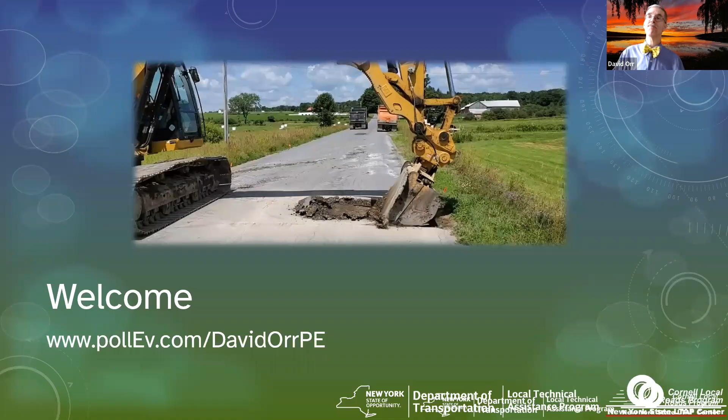So first, just find out who do you work for. So let's see who you work for here. Getting people logged in here. Also check to make sure your Poll Everywhere is working.

Okay, we've got quite a few folks who are ready for the weekend. It's only Tuesday, folks, we got a ways to go, and hey, we're getting rain. I know that's hard to believe, but we're getting rain, and it's nice and slow and steady, which is good for the grass. And we actually need some rain, so that's good. Okay, so about 1/3 of you work for consultants, a blend of town, county, village, and city, and a couple of state folks. So that's good. And then, of course, as I said, folks who are honest and work for the weekend. That's always good to see.

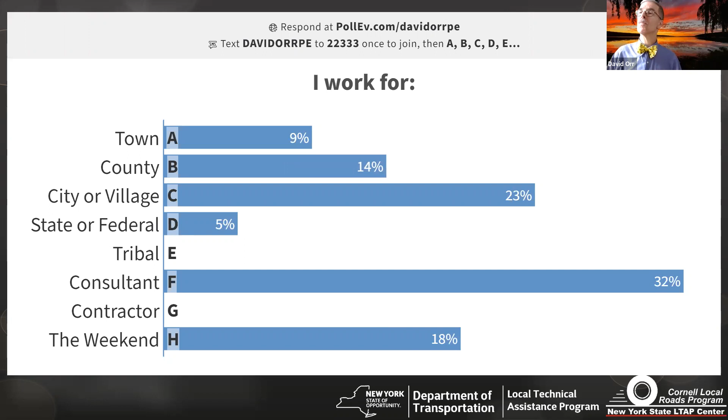Okay, next one here. What is your job? So again, this helps me quite a bit. Are you an administrator? Are you an engineer? Are you the highway superintendent, DPW commissioner? Are you in the field crew? Elected official, supervisor, or board member? Or you can even do none of the above. So my gut instinct today was going to be a lot of engineers and highway people, and yeah, that's pretty much what I'm seeing. Okay.

And if you put in none of the above, you could put your title in the Q&A, that would help me too. Just a quick summary here, so 3/4 of you are engineers.

Okay, that's good. Okay, where are you from? You can actually put a pin on the map. It's actually pretty cool, you drop a pin telling me where you're from. Okay, let's see where we got.

Somebody put in the Q&A from the last question - they're a facilities manager, that's good to know. We got quite a few folks scattered around the state, that's good to see. Today we don't have any swimmers in Lake Ontario, we've had that the last couple of times. I see somebody put in there from Pennsylvania - welcome, thanks for joining us today.

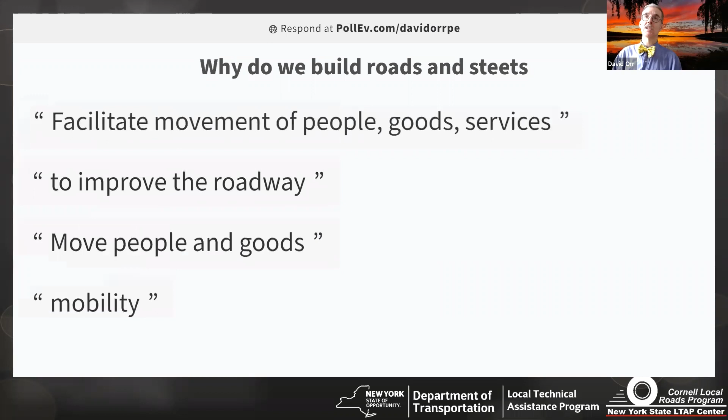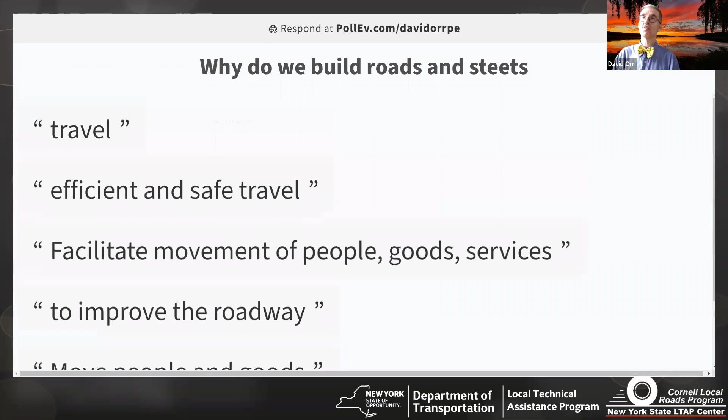And again, to access that you can type it in, or we put a link in the chat. Mobility, moving people and goods. Improve the roadway. Facilitate movement of people, goods, and services - all good answers. Efficient and safe travel. Move people and commodities - all good answers, all the kinds of things we'd expect.

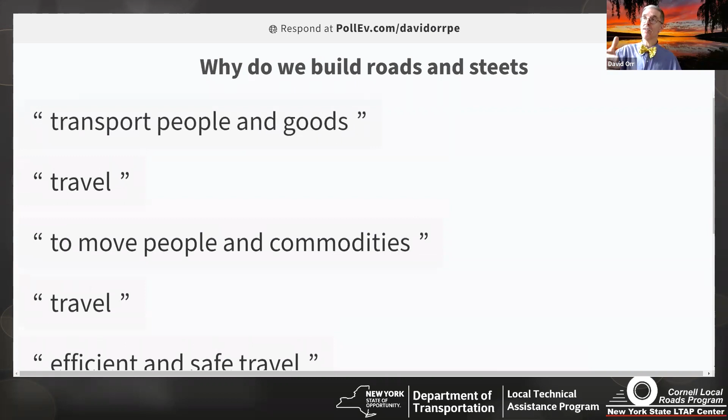You can really break down the why into three things. You need to account for the traffic - different types of traffic on a roadway: cars, trucks, buses, bicycles, and pedestrians. You account for the structure to make sure it can handle the loads on it, and the geometry, so you can go at speeds that are reasonable for the particular location - slow in a local residential area, a little faster, all the way up to the interstate.

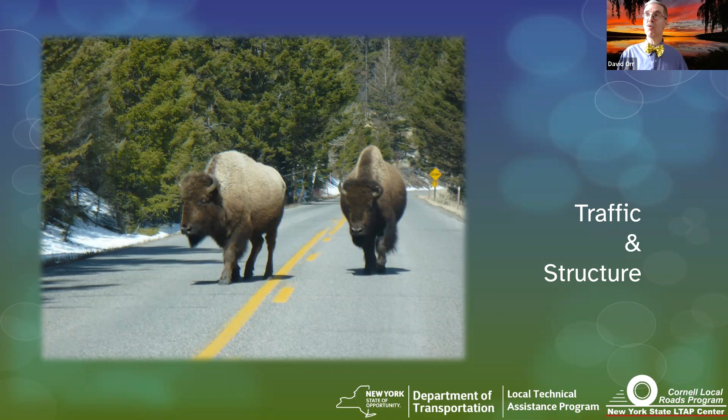Now, in terms of traffic and structure, we had an instructor who taught for us for many years. He liked to say, you need to build the roads to handle the loads. And that traffic can vary quite a bit - this is in Yellowstone, this could be bison that you might see that create their own issues. But roads can come in all kinds of shapes and sizes.

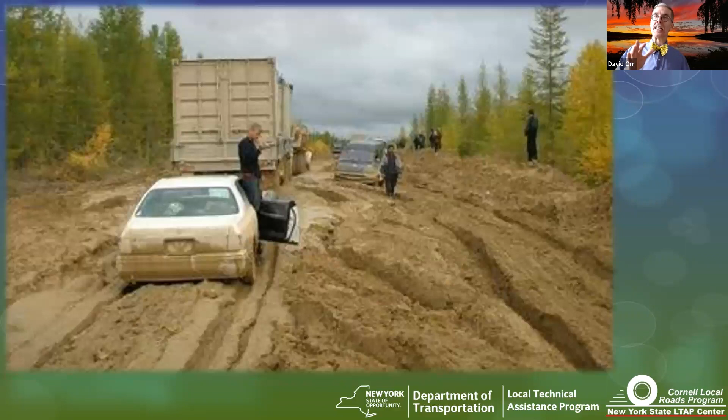It says the sound quality is not great, sounds like you're talking inside of a tin can. Let's just check and see what my sound is picking up - it's the microphone on the webcam. Well, I'm going to have to move on. If it's not good, you might check your audio. I've got somebody else who said the sound is fine, so I don't know.

I apologize for that. This particular material is not a good road structure - I can just tell you, everybody can tell that. But let's talk about what is a good material to build our roadway out of, in terms of the road structure. When we build a roadway, we strip everything off that's organic - these days we sell that - and we build a roadway up on top of the subgrade, the native material. So there might be a sub-base layer, a base layer, and a surface. All of it comes back to handling the vehicle loads.

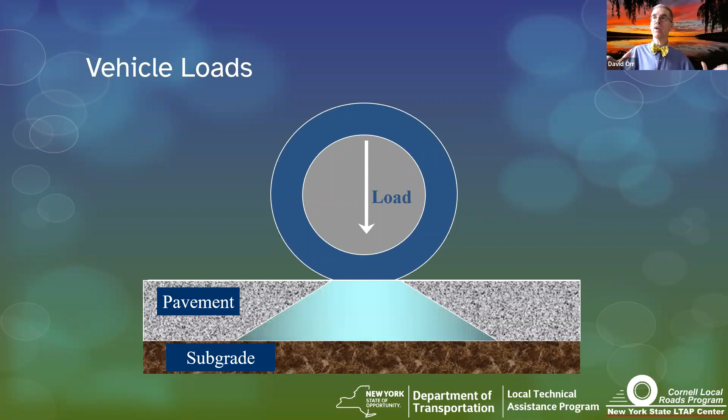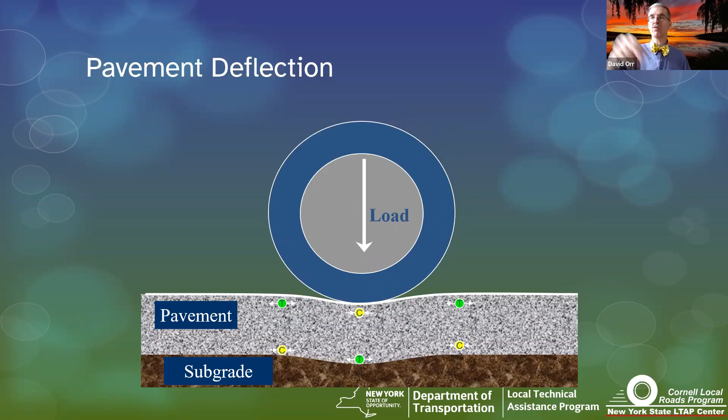You've got a load down there, and that load is spread out over the subgrade. What we're really trying to do is not break the pavement down by too much deflection, back and forth, back and forth. Now, I've got a little drawing here, but a video can show things sometimes even better. This is a video that was part of something done by the Minnesota LTAP Center.

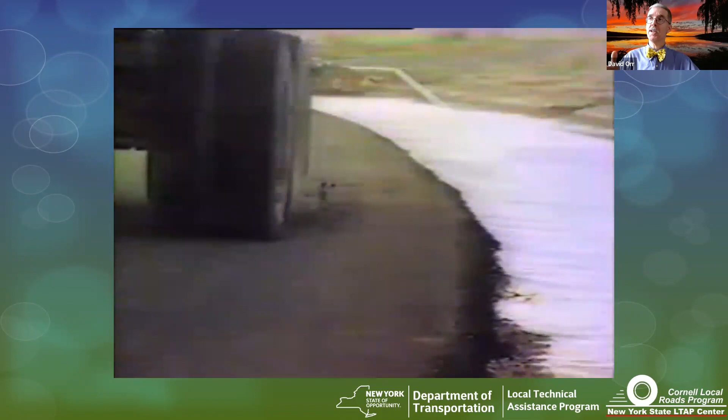This showed testing done by the Forest Service out in Nevada. Watch the two green dots, and you can actually see the pavement move under the load of the trucks. All pavements do this, and the more they do it, the faster they break down. This particular roadway was a testing roadway and failed perfectly, just the way you want it to fail, quickly. We don't want that on our road system.

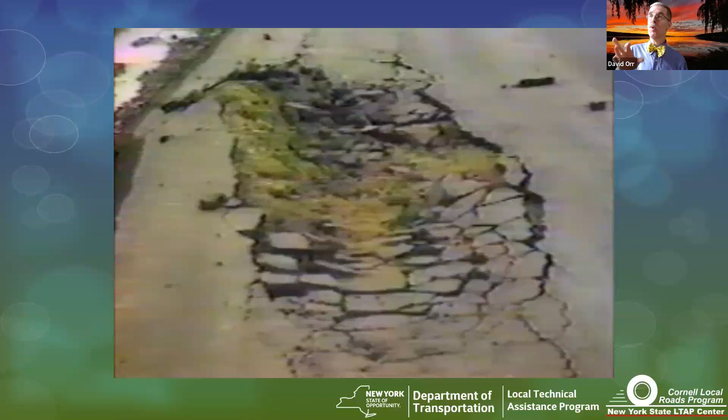Having a road look like this after only 81 passes of fully loaded trucks probably wouldn't be the best choice. So the question is, how do we avoid that? Well, we avoid that by having a really good, proper structure.

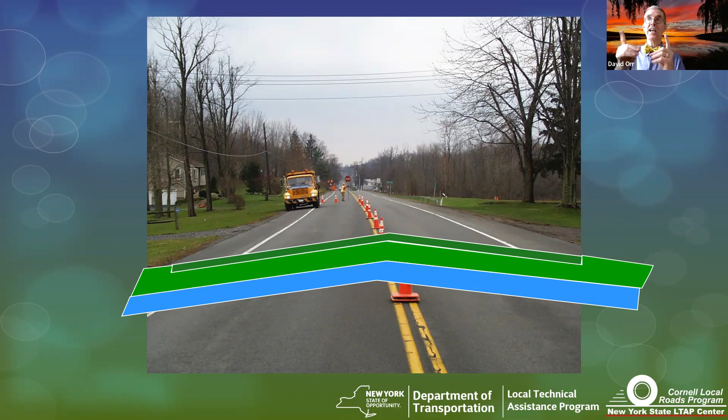If you're on a state highway, your structure is a layer of base gravel, then usually asphalt base, asphalt binder, and asphalt top—lots of asphalt, 8 to 12 inches. In that case, the gravel underneath needs to be good, but surprisingly not as critical as when you get to, say, a county roadway, where you've got a relatively thin layer of asphalt and a gravel base right on top of the subgrade. The gravel has to do more of the work there, so you actually need better gravel because it's doing more of the work.

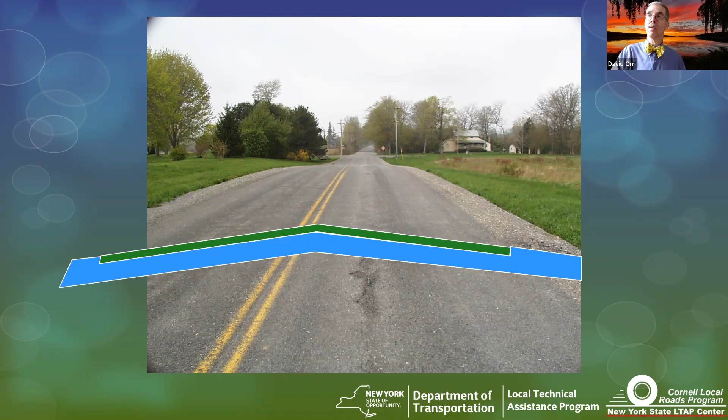You get down to a roadway that's only covered by, say, a chip seal, and that gravel is really doing all the structural work. The chip seal on top is just a surfacing for dust, for traffic, and to help shed some water. And of course, if you have an unpaved road, the gravel is doing all of the work.

Now, just to help me out, raise your hand—how many of you have gravel roads that you manage, or if you're a consultant, that you've worked on? Let's see how many folks here have gravel roads... okay, 5 out of 56, about 10% of you.

We'll talk a little bit about the differences between a surface gravel and a base gravel in a minute. But the quality of the gravel needs to be better under low volume roads, town roads, village streets, county roads, than under the state highway—surprisingly. One of those ironies of ironies.

So let's go back and look at our pavement structure a little bit. We've got that subgrade that we build on top of, we've got the subbase and base, which may be bound or unbound, and then a surface. We know that most local roads tend to be just subgrade, base, and surface.

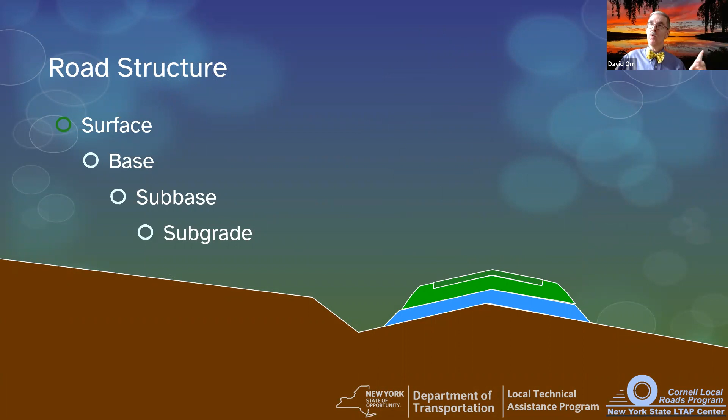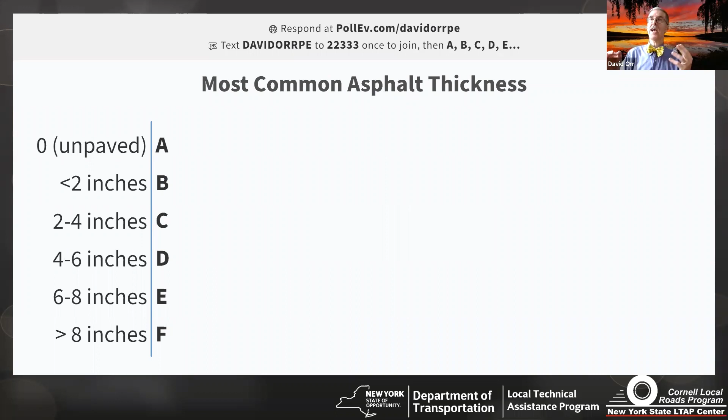So what I want you to do is help me out—we're going to do a little calculation. First, in your system, and for those who are consultants, think about the roads you've helped design or build. What's the most common asphalt thickness in that local road? 4 to 6 inches, or 2 to 4? So we got a fight between 2 to 4 and 4 to 6. I'm going to write down 4 inches as sort of our median thickness.

Now let's go—what's the most common gravel thickness? How thick do you put the gravel underneath the asphalt? 0 to 6, 6 to 12, some people have 18 to 24. 6 to 12 inches is by far the most common. I'll put down 9—it's halfway in the middle of the band.

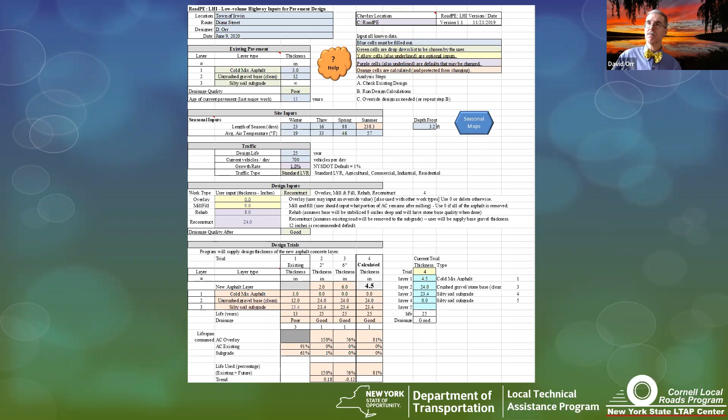Now I know what you're thinking, you can't read this at all. Well, it's okay, you can go on our website and search for RoadPE LHI, which is actually the initials of our previous director. Wondering where I came up with that bad acronym. You can try it yourself.

I am making some updates and modifications with the help of Lewis County, so when you go online you'll find some other sources. Give me a couple days to get that updated. It should work fine for most work, but it seems to have a problem with total reconstruction. We're getting that fixed. The concept is you check the existing pavement, you run the design, and then you can tweak it a little bit.

We set this up so you could get the whole thing done in the time it takes to make a cup of coffee. But we're not going to need a whole cup of coffee because I'm not going to do the whole thing. I'm going to pull the tool up and input the numbers you gave me.

So we're going to have hot mix asphalt of 4 inches, and gravel of 9 inches. I'm going to zoom this a little bit.

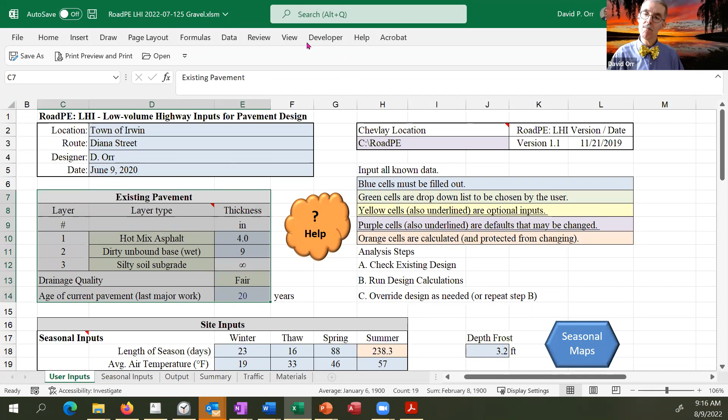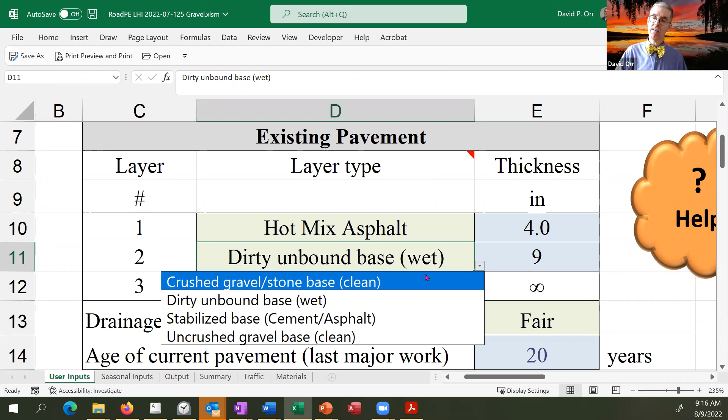I can choose the type of gravel. Do I have crushed gravel? Do I have a dirty unbound base? Do I have a stabilized base or uncrushed gravel that's clean, but tends to not be as strong as if it were really clean and crushed? I'm going to start with assuming we get a nice crushed gravel.

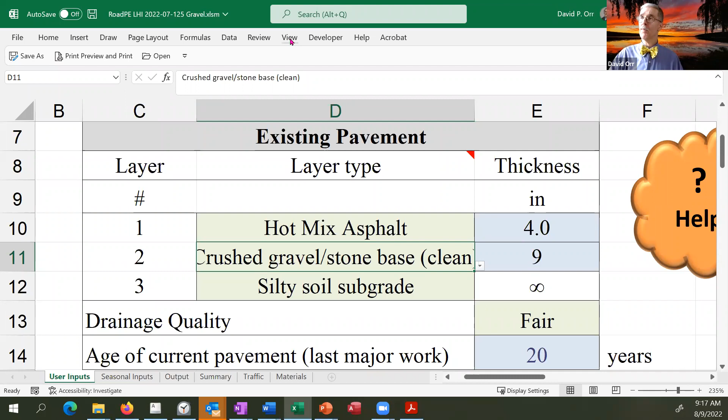Silty soil is the most common in New York State, so we'll leave that alone. I'll say the drainage quality is fair. Turns out I don't really need to know the age of the current pavement when testing, because I've got a trick that when I run the numbers, it'll calculate the design life for me.

I'm going to hit the button, it's going to ask if I really want to run it. And while it's running in the background, the computer screen is going to do its thing.

What we want to do is talk about why gravel is so important. What makes it the most critical single product we have when it comes to building roadways?

While I'm letting it run, raise your hand - how many of you think you have good sources of gravel? And just like before, a lot of people said yes, but a lot more are not raising their hand. We've only gotten about 10 of you so far who raised your hand that you have good sources of gravel.

Gravel sources are getting harder and harder to find, which is why we look at stabilization and some other techniques, which we'll come back to.

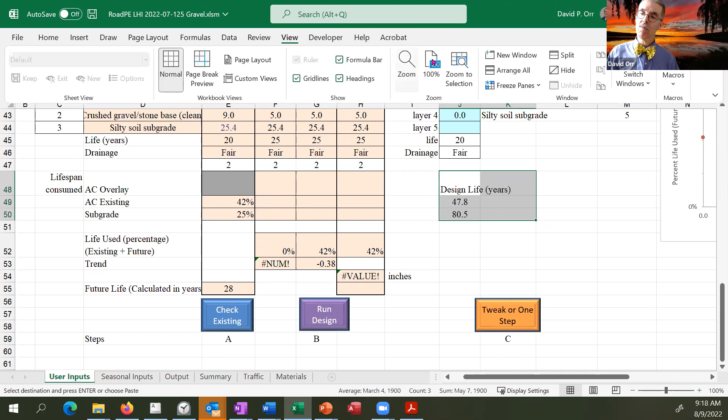Okay, so we're done, our computer did its calculation. I'll zoom to the selection. For the design life, I get 2 numbers: one is cracking in the surface, one is rutting in the subgrade. I take the lower number, and you can see that with good quality gravel, 4 inches of asphalt, and a relatively low amount of traffic, I'm not in too bad a shape. I've got myself a pavement that's going to last a good 50 years.

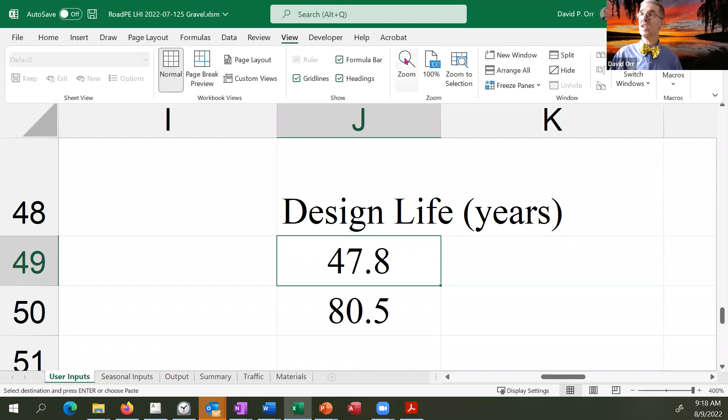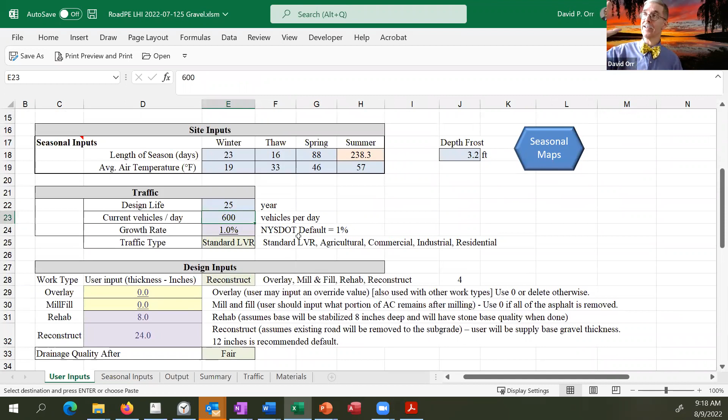Great, okay, so let's go back up here and change this. Of course I forgot to change the vehicles per day - I'm not going to do that now, that's my fault. We'll leave it at 600 just to illustrate the point.

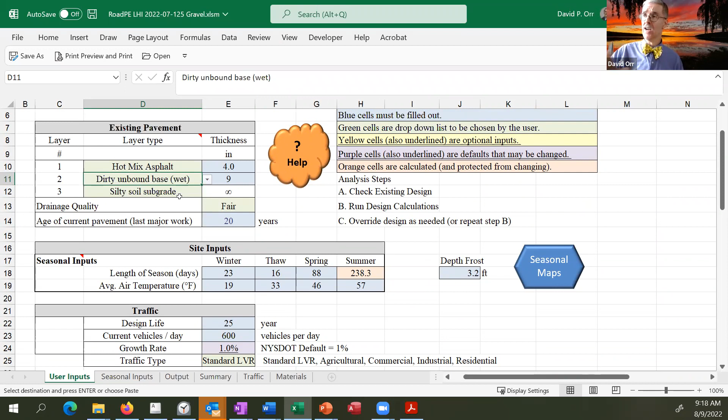I'm going to change it now to a dirty unbound base that's not the best quality, and rerun it. Everything else is the same. Remember, about 50, 48 to be precise, and we're going to let it run again, and I'm going to write that number down.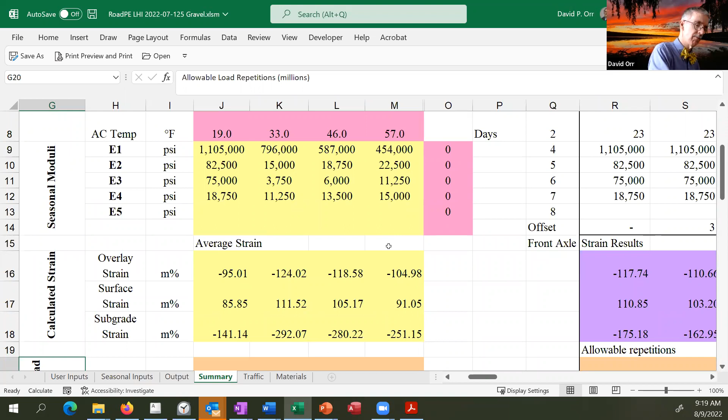It's a lot faster on my work computer than my home computer. And as you can see, it's down to 5 years. What essentially is happening is there's a lot more movement because that material is wet, it's soft, it moves more, like we saw in the video.

But gravel really makes a huge difference. So you can put all the asphalt you want, but if you don't have a good quality base, it's not going to last. You can call it Superpave, but Superpave can't overcome poor quality gravel. Now, I see somebody in the Q&A has put in that recycled concrete aggregate is more commonly used in gravel on Long Island. Yeah, it can be, but it still needs to meet the same requirements for what is good gravel.

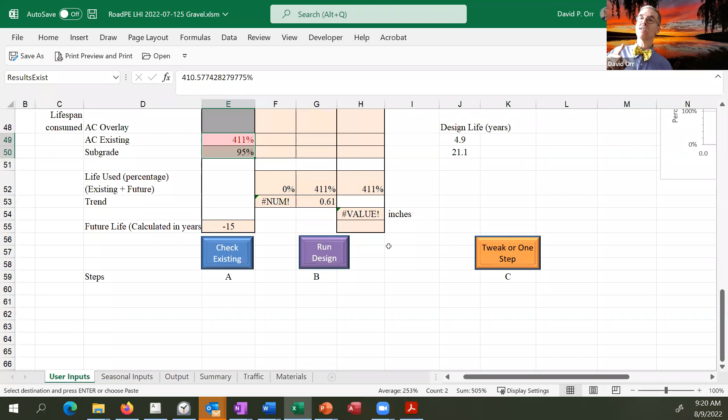So let's talk about that recipe. What is the recipe for good gravel? Well, it's pretty simple actually. One of the best things you can do, and if we had more time, we could run and show that

drainage makes a huge difference. Changing from poor to fair to good drainage, taking care of that, great thing to do, absolutely vital, okay? So drainage is part of it. And you need gravels that will drain well, which is why I'm mentioning the idea of recycled concrete aggregate can be a really pretty good gravel.

But you need the correct mix of materials, okay? And we'll talk about that here in just a second. You need some testing, a pinch of testing, to know what you've got, because you don't know what you've got, you might not be buying what you think. So let's talk about that. So what is our recipe?

Well, our good gravel should be clean, low fines. We don't want silt, we don't want clay. Those hurt us, and New York State is dominated by silts. And some fine sands can be problematic too, but really what we want to avoid are those silts and clays.

We want it to be strong, be able to handle the traffic that's on it, okay? That's one of the reasons people like recycled concrete in some cases, or they like granites and they like crushed stone and things like that.

It needs to be durable. That means it needs to be able to handle freezing and thawing and freezing and thawing and not break down. It's one of the reasons we don't really want to build a road with shale. Shale's not really a great material because after a few years, it turns into silt. And that's not really good roadway, okay?

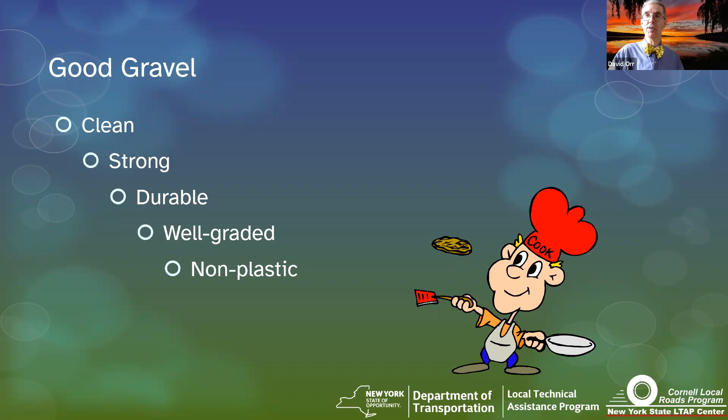I put in angular, now I put it last. For those of you who are putting it down underneath asphalt, if I have to choose from these 6 items and I have to give one up, I'll give up angular in a heartbeat because it's not as critical in the base of the roadway.

But for those who raised your hand and said you have gravel roadways, angularity is really, really critical. Because if you try to build a roadway that's got rounded stone, it's not going to stay. You see people do that all the time. They put in rounded stone in their driveway and the rocks get moved. You want that crushed base. And so think about where you're in, what you can get, where you are.

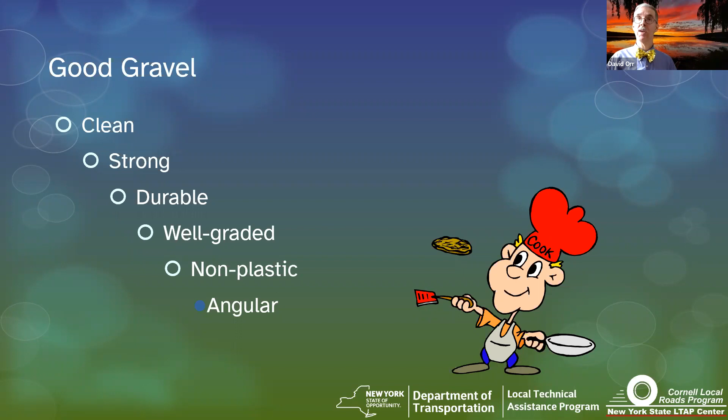Okay, so let's go back through a few of these things. Clean. What do I mean by clean? Well, gravel is actually a mixture. I call it gravel. Some people call it bank run.

Some people call it crusher run. You get all kinds of names for it. We have specs that we can use, but it's really a mixture of particles of different sizes. Gravel particles that are 3 inches down to a little less than 1/4 of an inch.

There's a technical number if you really care that you can look up in the handout in the chat pod. Sand is everything from smaller than gravel size down to just about what the eye can see, and then fines, which are silt and clay.

For good gravel surfaces, this is a gradation we found works pretty well in New York. If you're from Pennsylvania or Montana, you might see specs that are slightly different, but they'll be close. The concept is the same.

You'll always want lots of good big particles, gravel, whether it's draining layers or just dense graded. You want gravel, 50 to 70%. That's doing most of the work.

You need some sand to fill in the voids, which is one risk when we try to use just recycled concrete aggregate—that can lead to trouble because it doesn't have good stability. The sand is needed to help make it stable. In some cases we can overcome that if we design it, but most of the gravels we're using need some sand, 25 to 40%, to fill in the voids.

We need some fines—actually, no, we don't need fines at all. If you're putting the roadway under the asphalt, no fines is what you really want, but in the real world you're going to get some. However, for those who raised your hand about surface, you do need some fines because that's your binder. That's what holds the road together.

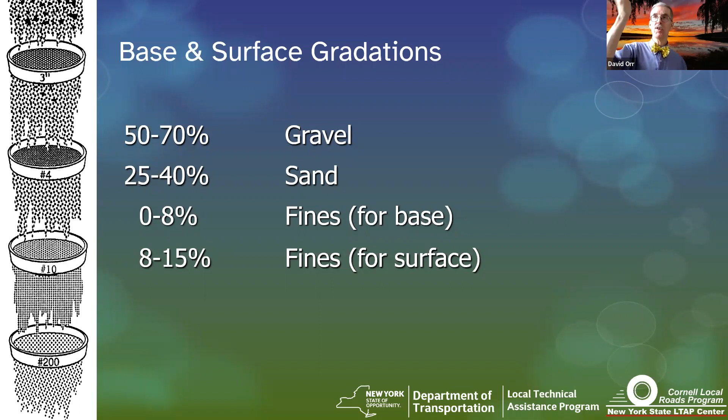As you get more and more fines, the fines dominate the characteristics when it's wet, like spring thaw, and it starts to get too soft. If you've got a gravel surface, you want some fines to bind it, but the water can evaporate, so you still get softness in spring, but not as bad. It's a nice balancing act.

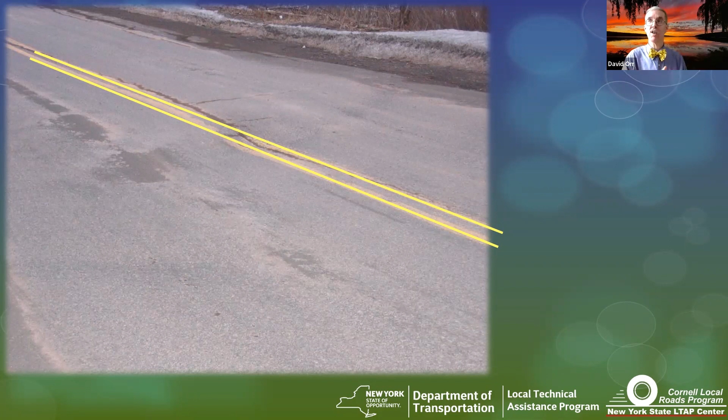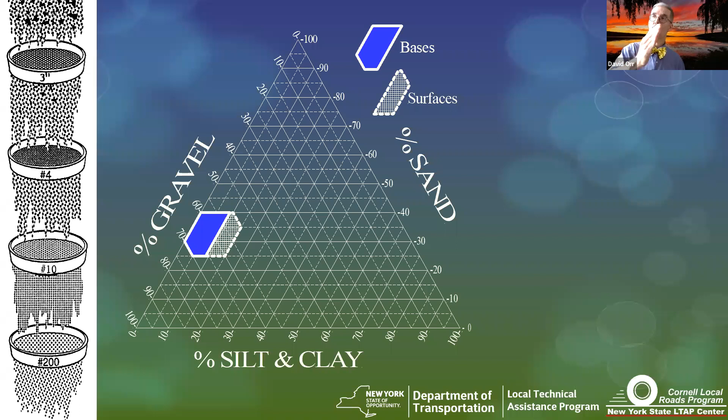Your fines content is getting a little bit too high. It's got to be under 8% or the fines can actually create frost heaving—a lot lower percentage than most people think. So you really want to be careful with your fines, and the kind of fines matter as well. We'll talk about that also in just a couple of minutes.

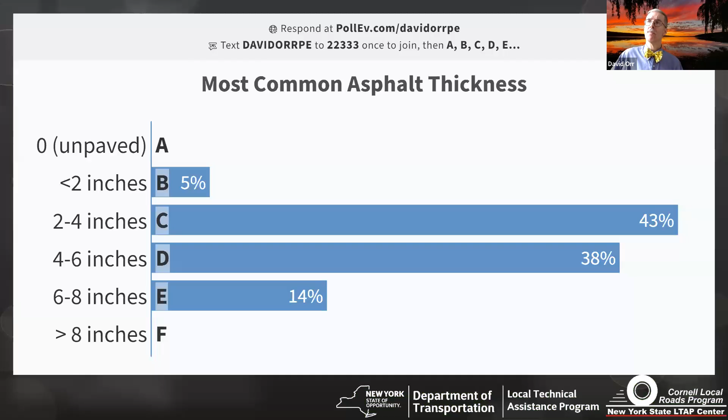So let me ask you this: how often should we be testing our gravel? Never? Once a year? As things change? Every time we do a new job? Or let's just buy state-approved material only, and then no problem, right? So let's see what everybody says.

Okay, everybody says, and I agree. Everybody says we should do it on each job. Okay. Some people say never.

So let's just come down here, and I'm going to go in here. This is pretty cool. I'm going to go over here into responses. I'm going to clear the responses.

Now I want you to answer the question a different way. What do you see people actually do? What is the actual gravel testing frequency we see people actually do?

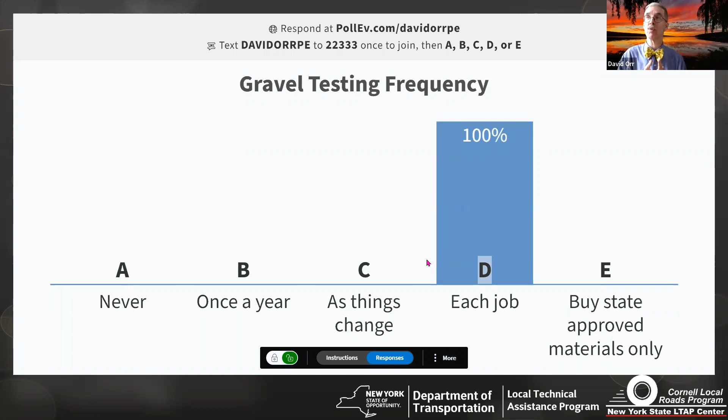Yeah, now we're seeing, this is what we see. Very few people test, less than half. And the ones who do test, they test once a year, maybe as things change. Yeah, there are still some who do each job and buying state approved materials.

I understand budgets, trust me, I'm a big fan of budgets. I've been spending way too much time looking at them lately. But we need to do some testing.

How much? I would argue that if you get good at it, you can do a hand test once a year with fancy laboratory stuff, which is only a few hundred dollars, and then check to see when things change and change it. But if you've got a really big job, do it every single job.

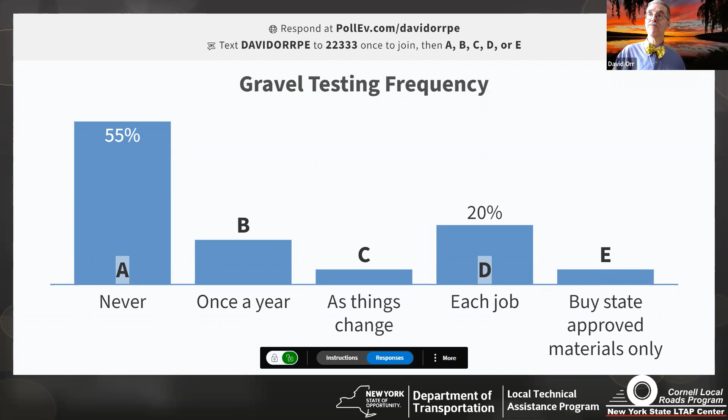You could do state approved materials, but we'll talk about a risk that you take if you do that in terms of what you're testing against. But a test is cheap insurance.

There's a company that makes big testing machines that I don't think they're in business anymore. They had a great motto. They tested concrete, and the motto was, one test is worth 1,000 expert opinions. So take a test.

Even if you never test it, take a bucket. Get a sample from each pile, put it into a bucket and hold it, label it, put a label on the top, put a label in the bucket, and walk away. Even if you never test it, you've got yourself something you can go back and test later on.

And then see, hey, this road failed prematurely, maybe it's the gravel. But if you didn't take it, now you don't know. Did it get contaminated? Was it something wrong with it? So take a bucket, it's easy to do.

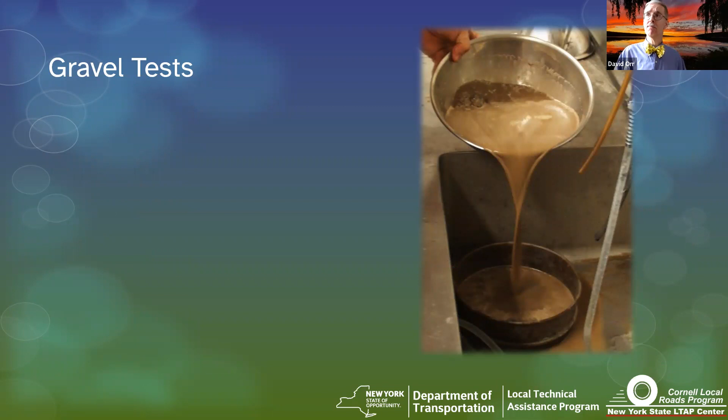And then what tests should we be doing? Again, at least annually on our pile or a gravel pit, we should be doing a sieve test, where we check to see how many fines are in there and what's the gradation. We should be testing for soundness.

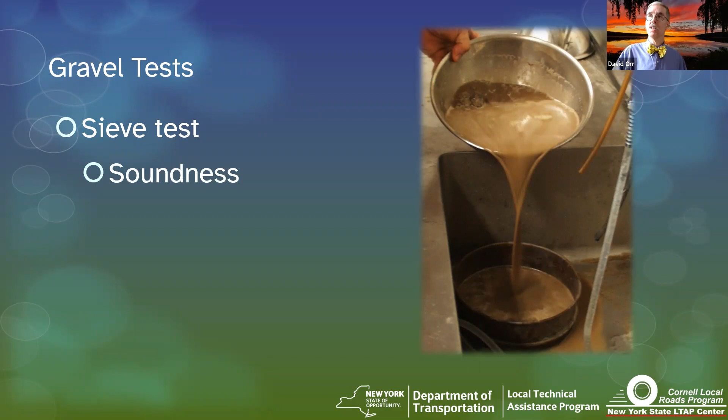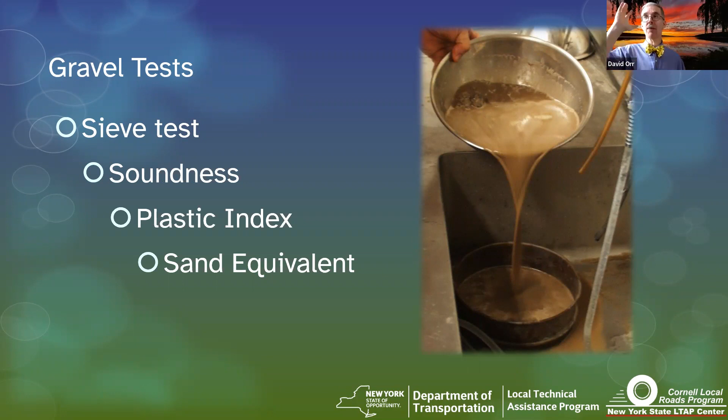Durability, we should be doing some plastic tests, and I'm going to give you an alternative to the plastic index test everybody's familiar with called the sand equivalent. Now, the sieve test we all understand, but let's talk about a couple of the others that you may not be familiar with, or you've forgotten about from your class back in college, and for those who were consultants.

Soundness test is really just to see how does it handle freezing and thawing. And we could use water. There is a test to take the material, put it in water, freeze it so the crystals of ice form and it breaks the shale or the rock apart, and we can check for soundness. That's what we're really doing, we're checking to see can it handle freezing and thawing.

Well, it turns out that's actually a pretty expensive test because it takes more energy to create ice crystals. And it actually takes a little bit longer to run that test as well. So the alternative is to actually use something that most people think about using for their feet, Epsom salts.

You take a saturated solution of Epsom salt, you drop your rocks into it, you pull it out, you heat it up a little bit, and then you can do the cycle pretty quick, 4 to 10, depending upon the testing that you're doing. And it creates little crystals. They're not exactly the same as ice, but you can take a measure of how sound your rock is, and there are standards for that.

If it breaks down too much, you've got a problem. Here in New York State, the materials that have got the most problem: shales that you see all over the Finger Lakes, in the middle of the Finger Lakes, sandstones and conglomerates that you'll see throughout the Catskills, and then there are obviously isolated pockets here and there of materials that just don't hold up as well. So you definitely want to check for soundness.

It's a test we very rarely do, but probably should be doing once a year, especially if you get into a new vein of gravel. Check it out, because it can change pretty dramatically.

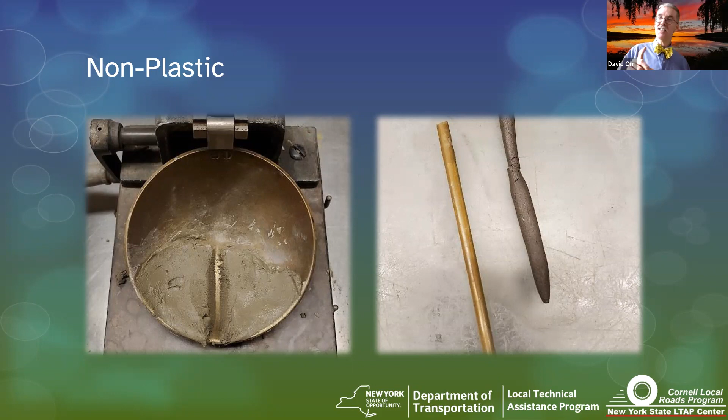So an alternative that we think is a better one for most road materials is something called the sand equivalent. It is the sand equivalent, not the sand equivalence. I know everybody wants to say sand equivalence because syntax-wise it's better, but the reality is, that's the name.

The idea behind this comes back to that old mason jar trick. You take your gravel sample, put it in the mason jar about halfway up, fill it with water about 3/4 of the way up, and shake the mason jar back and forth. Put it on a shelf, come back the next morning, and you've got a big layer of gravel, a thin layer of sand, and then all the fines on the surface. This is actually a scientific version of that test.

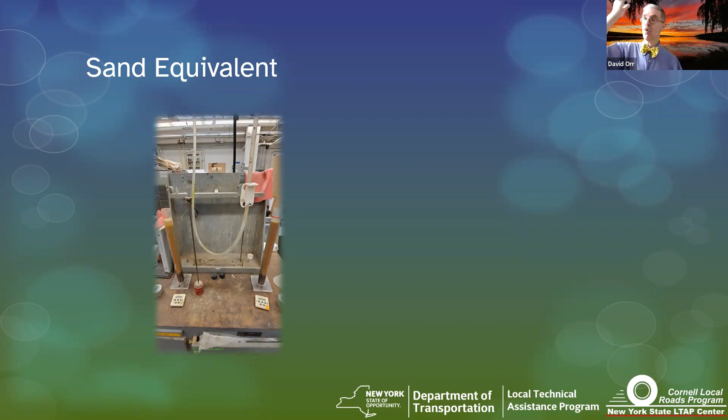We take the gravel particles out, and then put it into a special solution that causes it to settle very quickly rather than overnight. So by shaking it, we do the exact same thing. We shake it a certain number of times with a mechanical device or by hand. We then let it settle for a fixed amount of time - 20 minutes is the actual test time. And we measure the total height of the column.

Then we'll put a weight on it, and the portion that will support weight - that's the sand portion. That's the part that gives us strength. What's cool about this is that the finer the material, the more clay-like the material, the higher that column gets. So if you've got a really bad clay, a kaolinite, a montmorillonite, one of these fancy clays that's really bad, it has more volume, so it actually stays up higher. But silts will do that too - they'll stay in suspension and not drop down to the bottom. So you get things that are clay-like, in other words, they're soft when wet.

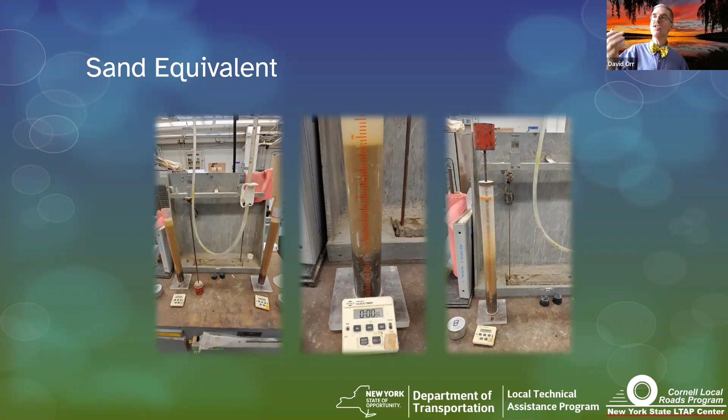What you do is take the ratio between the total height of the column and the part that supports weight, and that's your sand equivalent. That's pretty simple - the sand reading over the clay reading is just a ratio. A perfectly high, just sand or gravel sized material that's got some sand in it, theoretically could be up to 100. Real world's never quite 100 because that's the real world. Something that had no sand in it at all, all clay, could theoretically be 0. Generally there's enough particles when you put the weight on it that it doesn't go all the way to the bottom - it's 3 or 4, really low. But what's cool about it is it's actually more sensitive for the gravels that we use in our roadways.

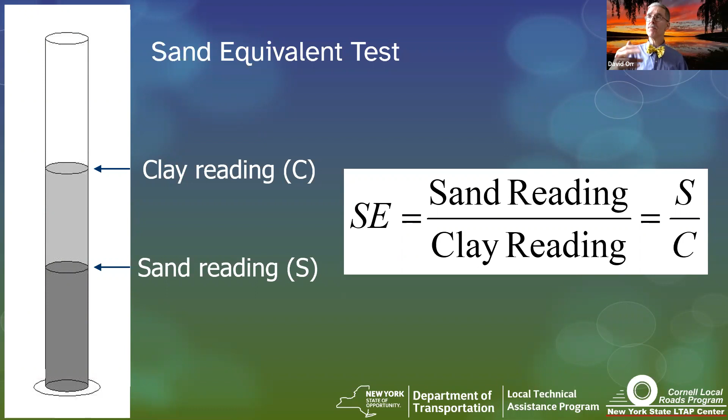So when you're doing your base selection, you can use this as an alternative. Rather than looking at plasticity, look at the sand equivalent number. Because if you're looking at the base - say you've got a county road and you want to put a base gravel down - that base has got to be really clean. It's really important to get a good quality base. 0 to 5, I can't really tell that apart.

I don't know whether a 6 or a 5 is really that different. It's not that sensitive a test, but the sand equivalent numbers change pretty dramatically as you get low plasticity in the plasticity index test. So it's a simple test.

I can run it in the field in about 40 minutes total. If we were doing this in person, I would have a column sitting over here and we'd be watching it live. But I tried thinking how I could do that on the screen, and I realized it's not going to be as effective anyway, because you wouldn't know if I'm just cheating, pulling one cylinder out and showing you another. I'm not going to do that to you.

But the sand equivalent is a pretty cool test, doesn't take long to run, and can actually be run in the field. So it's a pretty good way to look at things.

Now, in terms of gravel spec, as I said earlier, you could always buy state-approved material. I'm a big fan of buying state-approved material, but make sure you're asking for the right material. So how many of you, raise your hand, use item 4 gravel? Item 4 gravel.

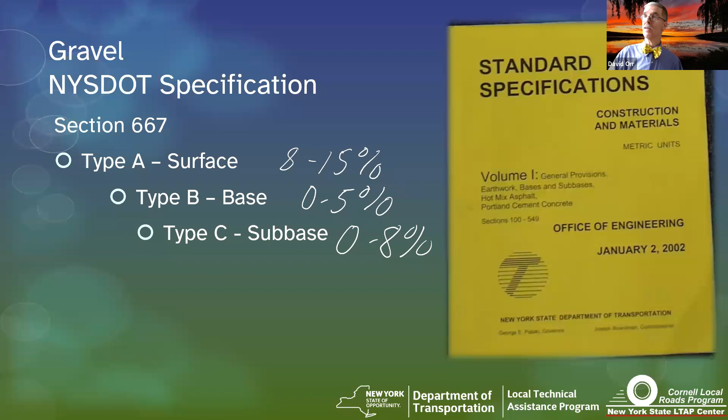So we actually worked with the state on the state spec. It's for type A, type B, and type C for surface, base, and subbase. It's 667, it's in the materials only. In that particular case, the amount of material matches that chart I showed you. So the surface fines content is 8 to 15, the base is 0 to 5, and the subbase is 0 to 8%. So there's a spec out there, and if you want to do state approved using that, great.

The other thing I would have you do is go learn some of those old hand tests. They don't tell you the numbers, they're not going to do much more than tell you something has changed, but they're very useful at that. Because if you've got a test that you've done from a laboratory and you do these hand tests, you can see when things changed, and now you need to go do a new lab test.

Now, if somebody asked, is number 35 gravel the same? That's a Pennsylvania spec, if I'm not mistaken, I'm not positive about that. You need to look at the spec, just look at the spec. The Pennsylvania dirt and gravel road folks have a driving surface aggregate, which has similar fines, a little bit more fines in it, but you can look at their specs and some others with low fines. The key is low fines, low clay, low silt.

Now, in terms of tests you can do with your hands, my favorite one: just take the material and put it in your hand. Just rub it in your hands and see. You got dirt on your hands? Probably got a little bit of silt.

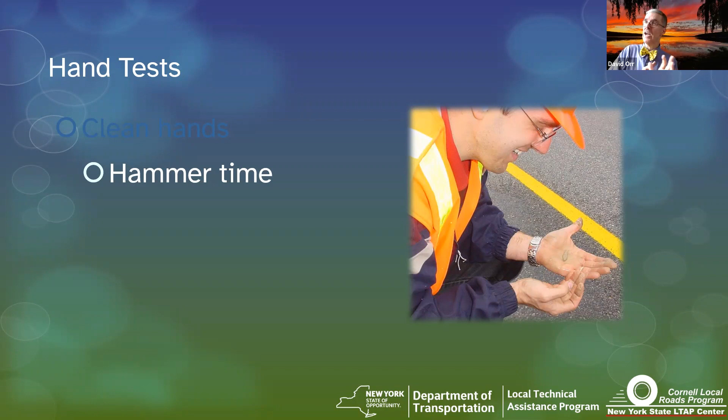You need to check for that. Take a hammer, hit it. I like to use a small 1 to 2 pound sledge and just drop it lightly on the stone. It should break after a few hits, but it shouldn't break easily, and it shouldn't shatter into nice clean faces. That's a brittle failure, and it probably means you've got shale, weak material, or conglomerate.

Take the big stuff out, take all the fines, and see if you can make a snake out of it. It's a field version of the plasticity test. Can be very useful. If you can make a snake, you probably need to check for the plasticity or the sand equivalent.

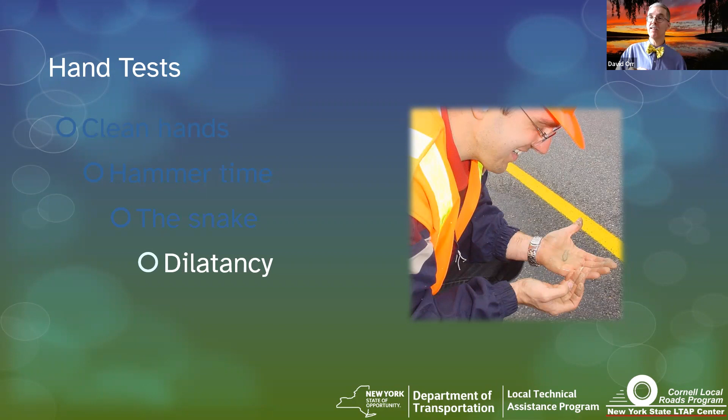Take that same material, put it in your hand, make sure it's wet, tap your hand a few times and look for the water to come to the surface. If it does, it's probably silt, which is good because it's not clay, but bad because it means it's probably more frost susceptible.

Then take that same material, put it on the shelf, come back the next day, and try to squeeze a small, half-inch size piece. If it breaks apart and goes in a big poof, it's mostly silt. If it holds together pretty strong, it's probably clay. Remember, clay, if it stays dry, is extremely strong. If you don't believe that, you've got a porcelain coffee mug, remember, it's made of clay.

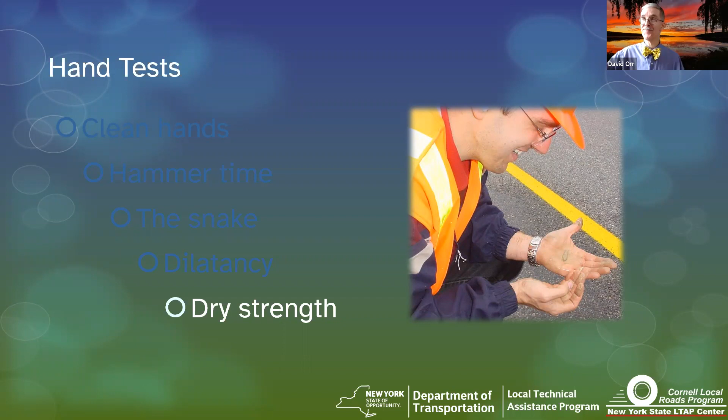The other thing is to go stop, talk, look, and listen to folks. Go out to the gravel pit, talk to folks who've used that material. You'd be surprised. I bet most of you know your good sources, and you also know the sources that have become not so good lately, where you're not sure what's going to happen.

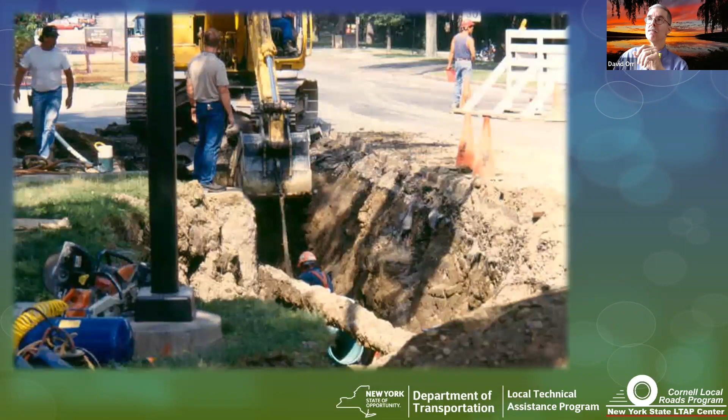Now, the technique that we like to use, you've already seen our friend here, FDR, full depth reclamation, or just reclamation, where essentially you clean up the existing base or even some existing piles of gravel. You could do that at a gravel pit, and you clean that material up. Now, I'm not talking about going deep, I'm talking about the base, the first 8 inches or so.

Oh, by the way, today's safety lesson, I think there were a few safety violations here. We talked about earlier why we build roadways. When we build them, we've got to be thinking about going home too. So let's not do this. I once went through a group and we counted something like 15 violations here that could cause the job to be shut down. So I don't want to see that on anybody's job.

But here's the thing, most roads have evolved, especially the local road system. This happens to be a road in the town of Pavilion from a book written over 100 years ago by the Department of Public Works, which these days we call the New York State Department of Transportation. It's a town road, and it was gravel. Most of our local roads were gravel when they started, and they were pretty good gravel roads. They found sources that held up under the loads that were on it, mostly horses.

But eventually we started getting trucks and equipment going down them, so we modified things. We got a good crown, a good gravel surfaced roadway.

Well, public demand, traffic volumes go higher, people want to pave it, which is fine. But remember, if you pave it, you've probably got a gravel that's in that hash zone. It's going to have a little bit more fines to hold it together. Now you pave it, it's going to fall apart. So before you pave it, you may want to think about cleaning it up.

Or just as common, we've got an existing road that potholes every single spring. You might want to check and see what's going on underneath. I bet you're in the hash zone. You'd be amazed how often we found that when we've talked to people or we've done our own test.

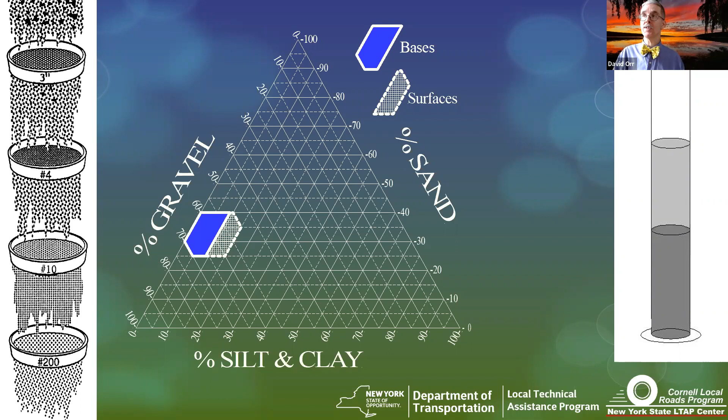Okay, now you could stabilize these materials. And how could you do that? Well, the easiest way to do it is just pulverize what's there. If you've got 4 inches of cold mix or hot mix on top of the existing gravel and you're close, just mixing the two together may get you in the blue zone where you need to be.

You could mechanically stabilize it. That's a fancy word for saying you could bring in some fresh stone. Just bring in some stone. When the blend is done, you're done, walk away. That's a case where those recycled concrete aggregates can work really well because we know they have no fines, mostly. So you blend them in, you can drop the fines content pretty quickly.

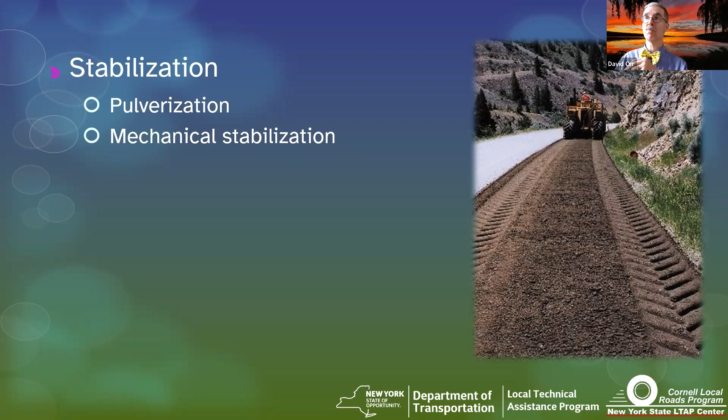You could use chemicals to stabilize, bind those fines up. That's a pretty cool technique that works pretty well. Most of the time in New York State, we tend to use salts, calcium chloride, something like that. But remember, with the calcium, the fines content doesn't change. It just changes the frost susceptibility.

So if you really need to get rid of the frost issues, you need to be thinking about bringing in cement. Now, I put in lime fly ash, mainly because I don't know who might get on our webinar. Not likely to be used here in New York State, because to make it work, you may actually have to bring in something to react against the lime. You need a little bit of reactive material, usually some clay in there, to react. Adding fines in before you add in your lime seems like a risky thing to do. But there are parts of the country where the subgrades or subbases are such that this works really, really well, lime fly ash.

There are other techniques for adding fibers these days and things like that, but let's talk about existing techniques right now, okay? And then, of course, the one that's probably the most common stabilization technique used here in New York State is bituminous, where we use emulsion or foamed asphalt, and we could do a whole webinar just on those techniques. They're pretty cool. In fact, we actually have done a stabilization webinar. But I just want you to keep in mind there's ways to stabilize your existing material.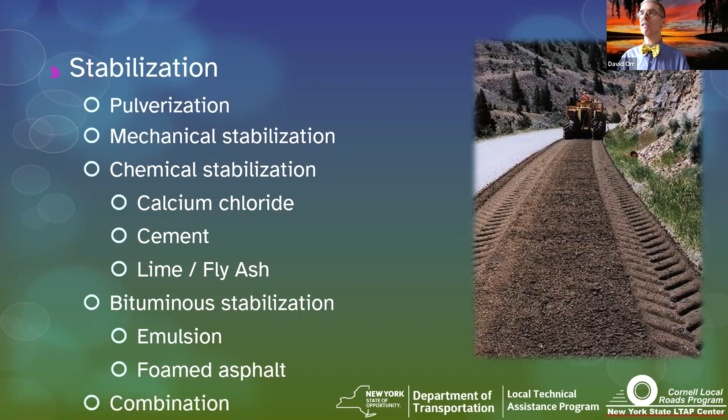Could you combine these together? Well, of course you can. That's always something you can do when you combine things together. Here's a demo we did at our highway school almost 20 years ago. 2007, I think, I'd have to look it up.

If it's extra asphalt, it can create balls and actually make it soft when it's the right type of year. If it's cement, it can make it brittle, and that's what actually happened in this case. Too much cement became brittle and it got cracks, and they actually had to go in and fix the cracks and then overlay it. You really don't want to have to do that, okay?

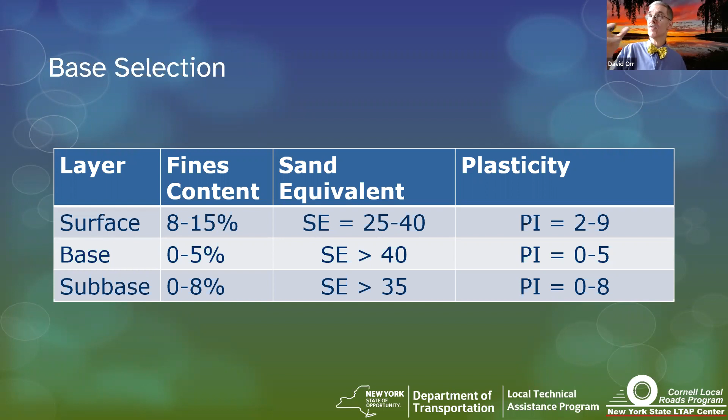So how do we convert from one to the other? Well, we don't have it. If the fines content is 0 to 10%, most of the time we can just bring in some aggregate or pulverize it, assuming you have a good sand equivalent number. Because by the time you mix those things in, you've got pretty good sand equivalents when you're done.

If you've got enough fines in there to make it worthwhile, you can actually add asphalt, okay? If you don't have enough fines, don't add the asphalt. It actually makes it softer, okay? But again, you still need plasticity to be very, very low. And the traditional has been look for plasticity under 6.

But what we found is you really want to look at the sand equivalent number, because again, it's hard to tell apart 0 to 6 what the plasticity is. And if you've got no plasticity, you can actually get away with a lower sand equivalent because you don't have to worry about those clay particles getting in the way. But the sand equivalent's a better test in this particular case.

You could use calcium chloride if you've got a good sand equivalent, but remember, you're still going to have the same fines when you're done. But for low volume roads, good technique, reduces the frost susceptibility, reduces the spring thaw problem. Very good technique, and works on a wide range of fines contents.

And then, of course, you could always use cement. And again, I put in there just so you know the lime fly ash issue, but you do need some plasticity. It needs to be above 11, where the plasticity now becomes more important than the sand equivalent.

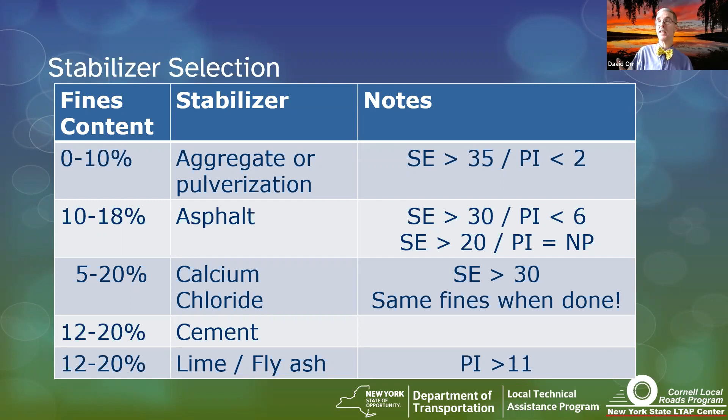But you want to have all of these tools in your toolkit because we have a lot of materials that don't meet the sand equivalent. And now you really need to be thinking about cements and other techniques. To know, you got to do a test. There's nothing else I can tell you. You got to get in the hole. You got to do a test. I'm a big fan of test pits versus just cores because you get more material.

Okay, and I could have shown you a modern test pit we did up in Lewis County a couple weeks ago - actually about a month ago now. I figured I'll show the picture when I actually had darker hair, so you can see what's going on. Go do a test - one test is worth 1,000 expert opinions.

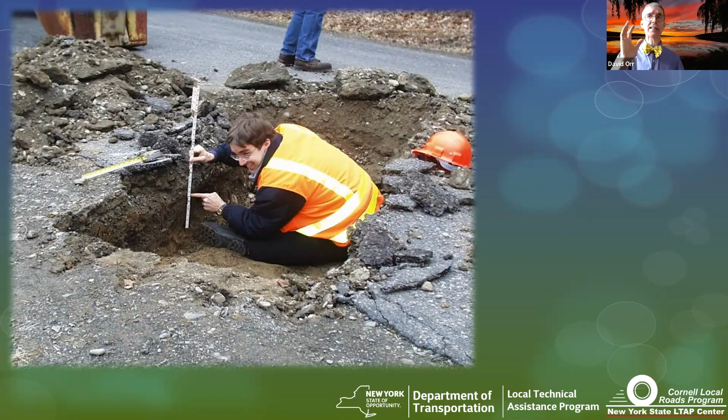Okay, so now we're going to finish with our PDH questions. They're pretty simple, I hope you can get them right. At least if you don't get them right, it's my fault, not yours, because I didn't teach you well.

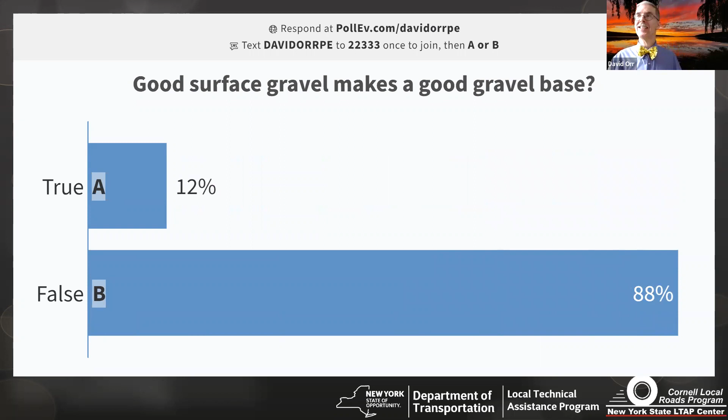Good surface gravel makes a good gravel base - true or false? Okay, yeah, it's false. If you've got a good gravel surface and you cover it over, you probably had some fines, 8 to 15%, just by default. You put a chip seal on it, a cold mix, a hot mix - the water builds up and blows it apart. If you've got existing roads that break down every spring and they're potholing, check the base. I would be stunned if you don't find a high fines content or a low sand equivalent number - one or both. And that leads to this kind of problem.

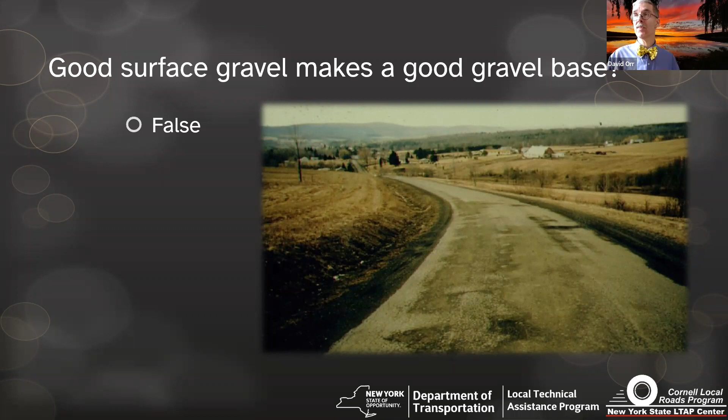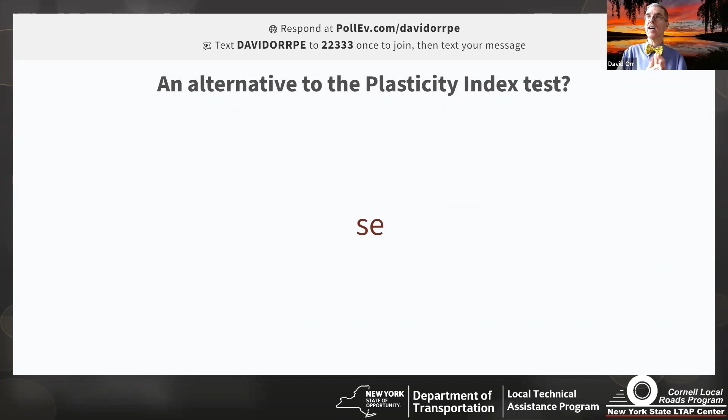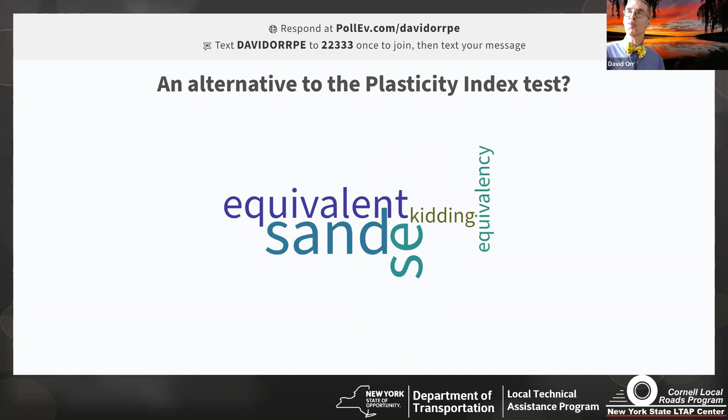So what's an alternative to the plasticity index test? You can type this one in - now it's going to be a word cloud. If you type in the full name you're going to show up with words, but SE is another way to think about it - sand equivalent. Yeah, y'all are getting pretty good. I'm a big fan of the sand equivalent test because it seems to be more sensitive for materials that are glacial tills, which is almost all of New York, large parts of Pennsylvania, and even in places that didn't have the glacial. If you've got silty materials, this tends to be a pretty cool test.

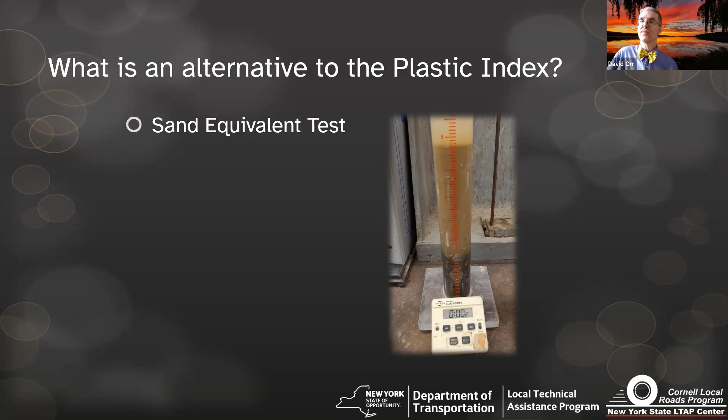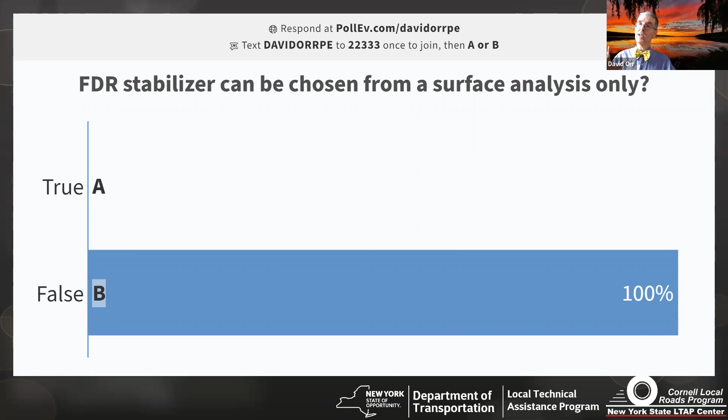Full depth reclamation stabilizer can be chosen from a surface analysis only - I can choose my stabilizer by just looking at the surface. Now, I think you know that one, but let's be honest - way too often we choose the solution. We look at the road and we go, oh, we're going to use asphalt, oh we're going to use calcium, oh we're going to use cement. You've got to go out and do a test pit. You really need to know what's going on underneath, and figure out what's going on with the drainage.

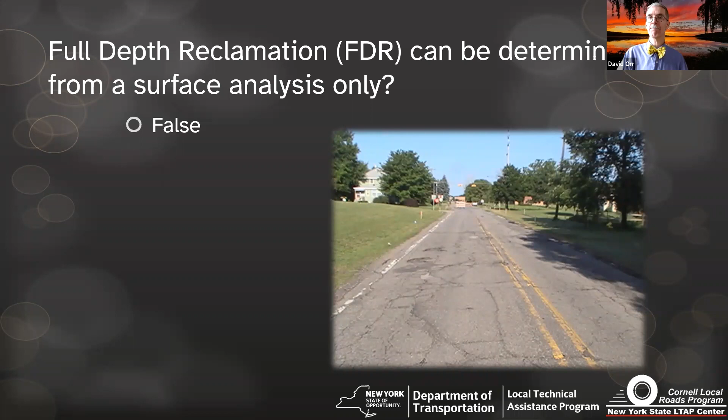When we did that test pit up in Lewis County, we actually found one of the two places we stopped looked like they had a thin layer of asphalt, put gravel on it, and then road on top of that. Well, there's your drainage problem - you're locking that water in, and you've got a layer that's not going to move that well. So go out there and do a pit, do the shake test, do some testing. It's a few hundred dollars - it's cheap insurance.